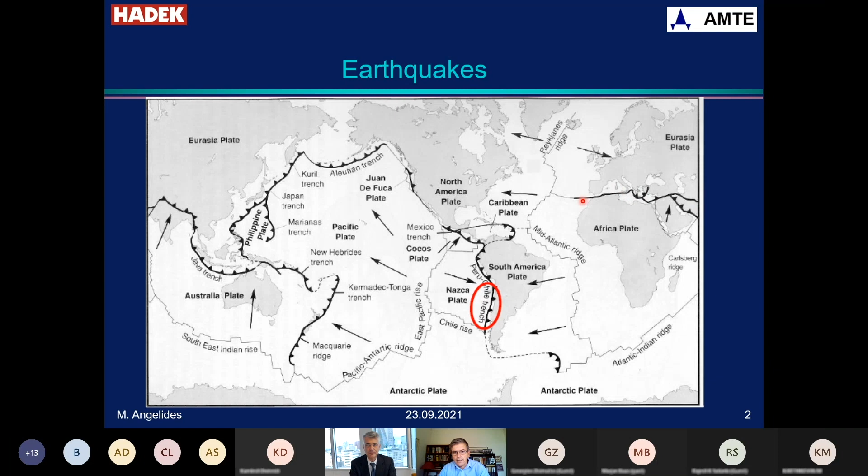This fault line is sometimes called the Ring of Fire. It's the west coast of the Americas, from Alaska down through Japan, Philippines, Indonesia, and through New Zealand. There's another large fault line extending past northern India, the Himalayas, and on the other side Iran, a bit of Syria, Turkey, Greece, southern Italy, and then North Africa—Morocco, Algeria, these places.

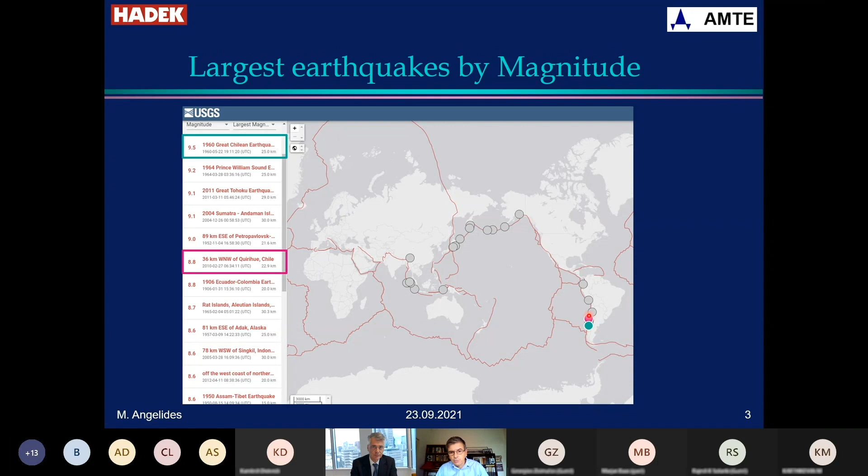This is a graphic representation of the world's largest earthquakes ever recorded, shown as circles. The largest one, this bluish circle, was in Chile in 1960, 9.5 Richter magnitude. The purple circle is the one we'll be talking about—the sixth largest ever recorded, also in Chile.

The mechanism of earthquake generation in this particular case, where the Nazca plate is pushing the South American plate, is by subduction. The plate goes under the South American plate and generates an earthquake when it snaps.

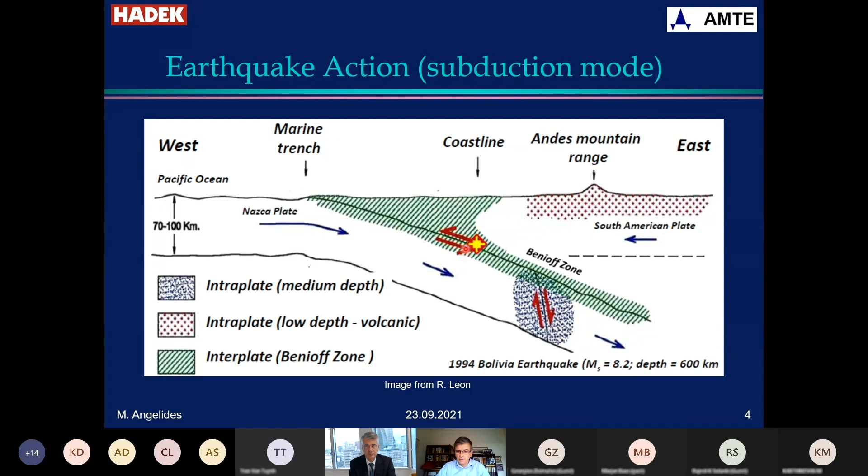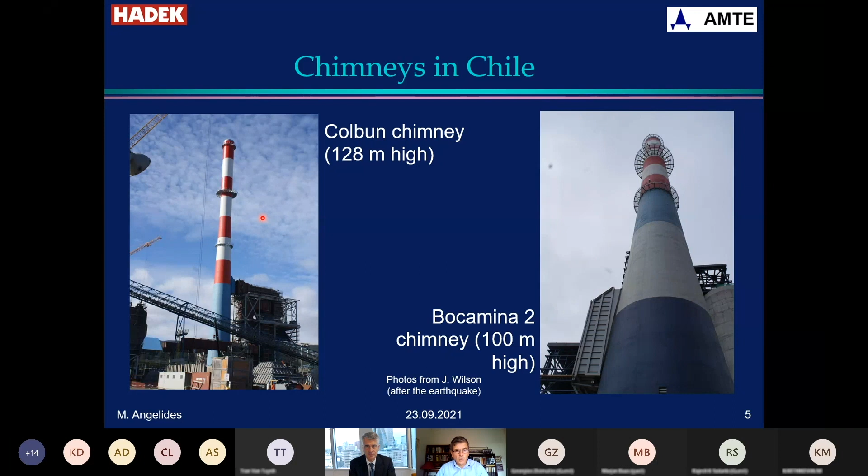The chimneys we're talking about are two chimneys—128 meters high on the left and 100 meters on the right—at the Bocamina 2 power plant on the right, and at the Colbún power plant on the left. These photos were taken after the earthquake, by the way.

This is a schematic section through the height of the two chimneys. Again, these are new chimney design chimneys. Therefore there is no liner—in other words, the liner, in the form of Pennguard blocks, is glued to the inside of the concrete windshield.

In these plants, the owner was Colbún for the Colbún plant and Endesa for the Bocamina plant. For both plants the EPC contractor was Maire Engineering. The chimney constructor was Karrena—today part of the Dominion Group. The chimney designer for both chimneys was AMTE. The chimney type, of course, was the new chimney design.

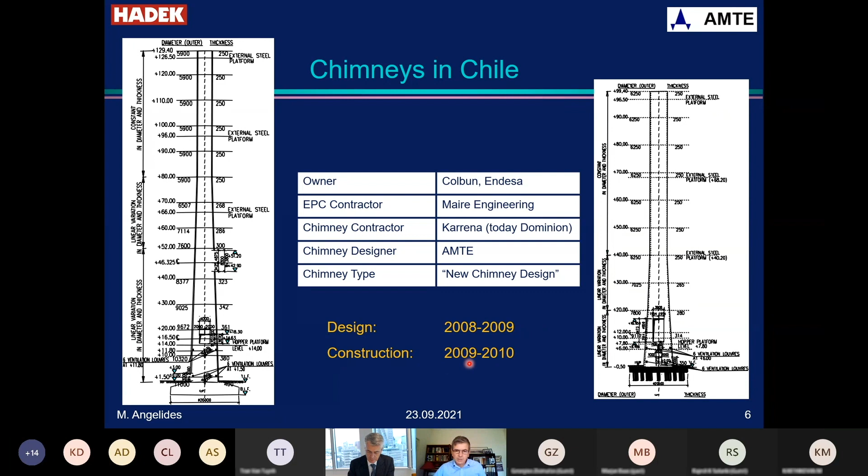The design took place in the period 2008-2009, and construction shortly afterwards, 2009 to 2010. The applicable design codes were the codes in effect in Chile at the time, which includes two earthquake codes. Interestingly, Chile has two earthquake codes—one for general buildings and one for industrial structures.

This is remarkable because industrial structures indeed have different requirements and different responses than usual buildings. The American Code for concrete chimneys was also applicable, as well as the American Concrete Code, and all the other American codes like the Loading Code and so on.

Additionally, the projects had specific, more stringent seismic design criteria set by the consultant of the owner, Professor Ernesto Cruz, and of course the soil report.

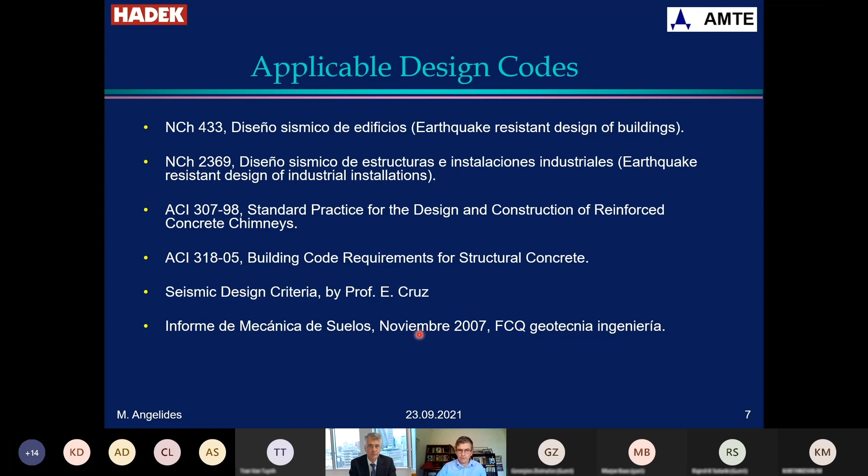Since there are several gentlemen from India, in this graph of the design response spectra I have introduced the Indian response spectra for the three highest zones—5, 4, and 3. In dashed line are the design spectra for the two projects we're discussing, Colbún in blue and Bocamina in purple. You can see the requirements of this project were similar, more or less, to what one would expect between Zone 5 and Zone 4 of the Indian Code.

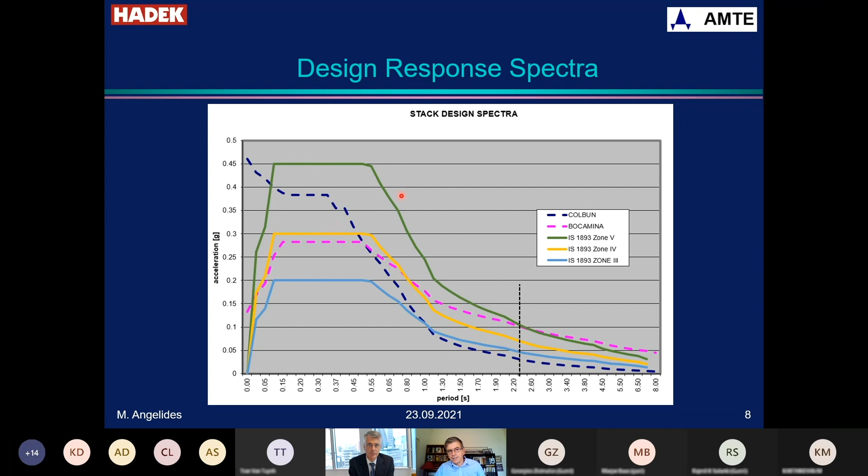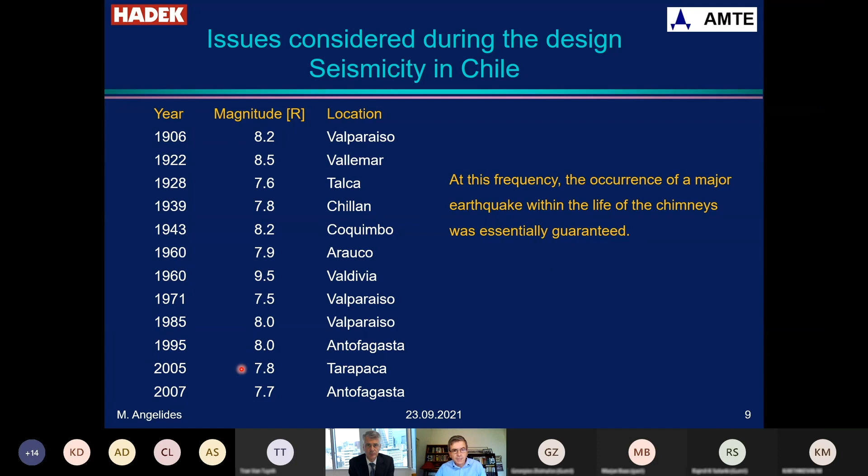With this history, you were assured to get a big one. Of course, we didn't know it would happen a few months after construction.

Looking at failures of concrete chimneys, there aren't that many reported. The most famous one is probably the failure of the Tupras refinery chimney in Turkey following the Kocaeli 1999 earthquake. It was a 115-meter high chimney, and it failed due to a failure of the opening region.

Thermal cracking is usually what is associated with failure in chimneys. This is an example here of typical thermal cracking and inadequate horizontal reinforcement.

There is, of course, a case where a chimney collapsed in India in 2009 during construction, during slip forming, at 240 meters out of what I believe was 270. This was probably apparently attributed to concrete strength issues during slip forming.

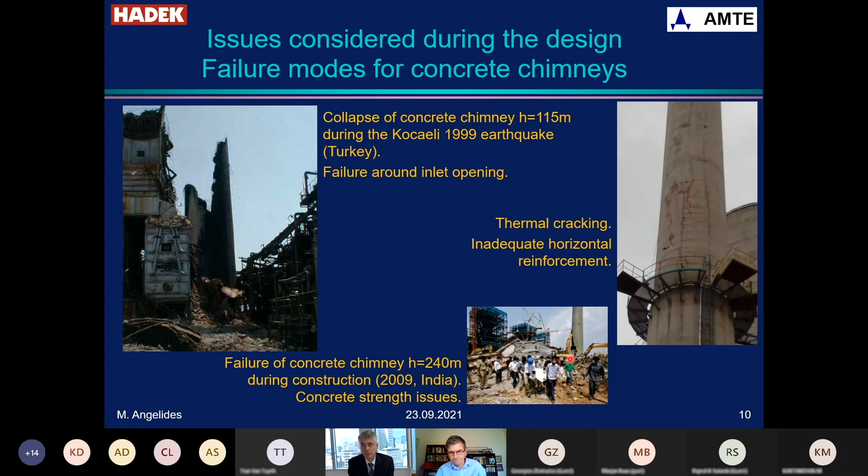So the general methodology followed for the seismic design was as follows. Chimneys were designed on the basis of forces determined from a response spectrum analysis using the design spectra of the project. Because of the seismic environment, the chimneys were detailed for ductile behavior, and we used the CICIND code recommendations for that, which involve limitation of the horizontal bar spacing, increased lap splices for the vertical bars, and limits set for the reinforcement ratio with respect to the axial forces, vertical reinforcement ratio.

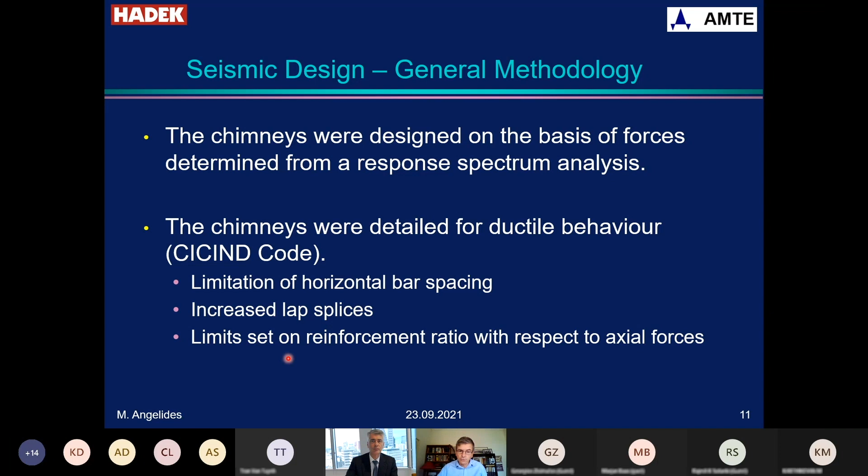Now, going to more specific issues, we used reduced behavior factors at critical locations to ensure satisfactory post-earthquake response, which means resistance to aftershocks. The American Chimney Code at the time, and so did also the design specifications, project specifications, specified a behavior factor R1 equals 3.

This was not a good choice, but it was common at the time. We used in this project 1.5. And this is the value that now the current American code has changed into.

The chimney, being a cantilever structure, does not have any reliable mechanism for developing plastic hinges without essentially collapsing. That's why one has to be very careful about the assumptions one makes about structural damage and without failure, without collapse.

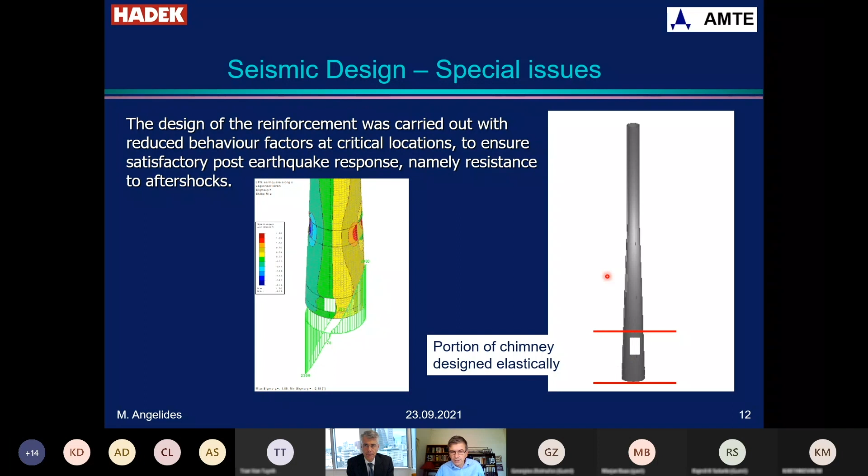Additionally to this reduced factor, the bottom part of the chimney was designed elastically, because there's also another opening, a large door opening, not shown here. So we decided that we needed to design that elastically to protect the chimney.

Another special issue is in chimneys that are tapered. If you remember Professor Gleick's lecture two weeks ago, he mentioned that up to a certain height, new chimney design, chimneys may be cylindrical. In our case, we deviated from that because we have a much higher requirement from the earthquake than usually happens with wind. That's why both chimneys are tapering up to a certain height, approximately up to mid-height.

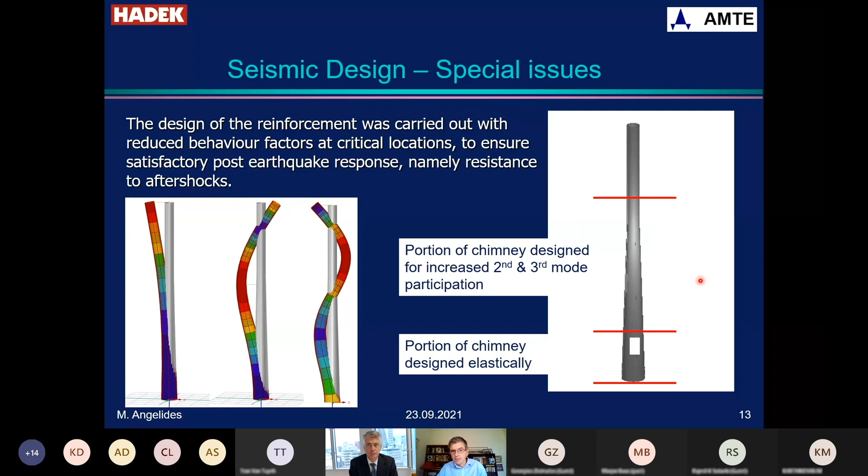Tapering chimneys have particularities where the second and third mode become more important in vibration than usually happens for cylindrical chimneys. Therefore, we assumed an increased participation of the second and third mode. For example, in a cylindrical chimney, you would expect 60 to 70% participation of the first mode, while in a tapering chimney, this changes drastically. Similarly, second and third mode participation are increased in the tapering chimney.

This is important because it gives us significant moments at these locations. And of course, since the behavior of a chimney in an earthquake is not idealized, it's not a sum of modes, but it's a forced vibration, these increased moments could manifest anywhere along that height.

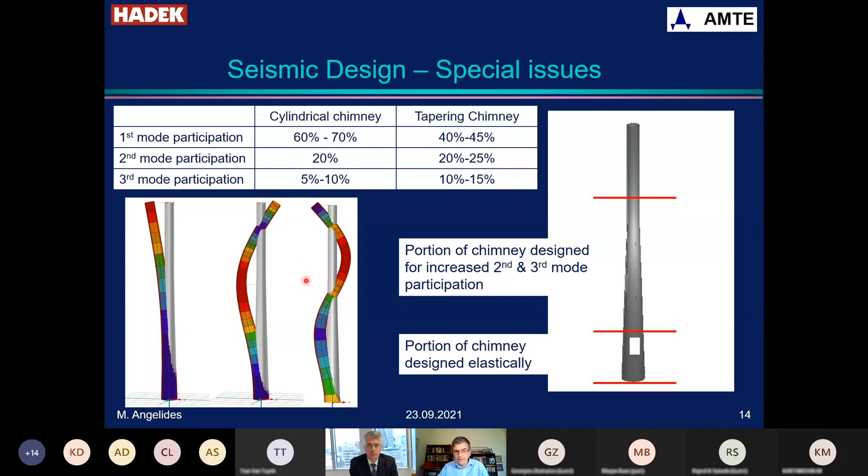We used two sets of models for the design. We usually do that in important projects. One is the design set, and the other is the verification set, to make sure that we control the results entirely. Each one consists of a beam element model without the foundation and of a finite element model detailed with all openings and foundation.

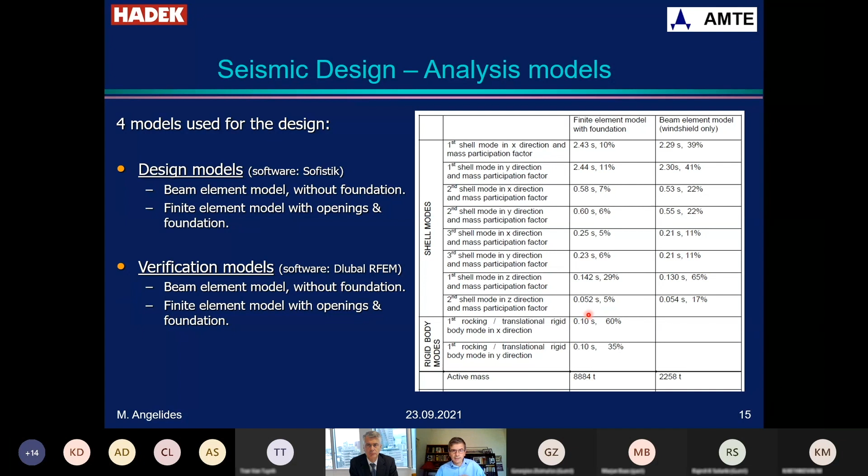You can see here the comparison of results in terms of vibration characteristics with different models. This is the finite element model, and you see, for example, here on the second mode, the high stressing of the region of the opening.

The chimneys, I forgot to mention, have two inlet openings. One is here and one is there. This is already highly stressed on the second mode. And on the third mode, you see here also a rocking mode of the foundation.

In the Colbún foundation was a flat slab, and the Bocamina foundation was on piles. So this image is for the Colbún chimney.

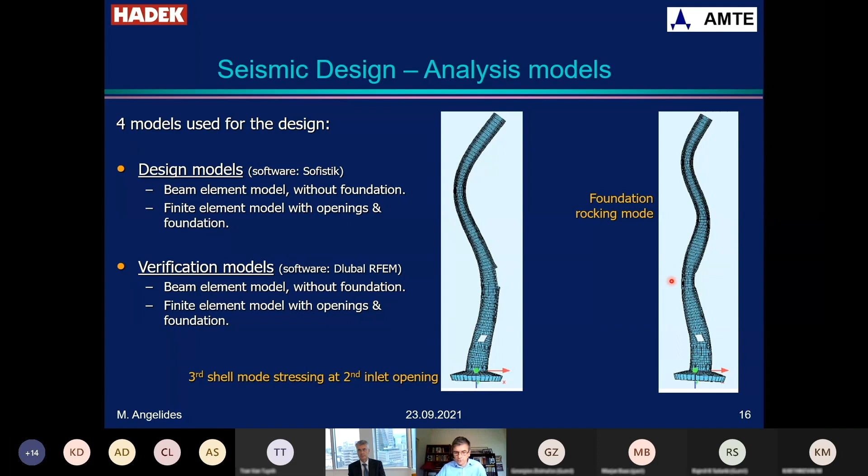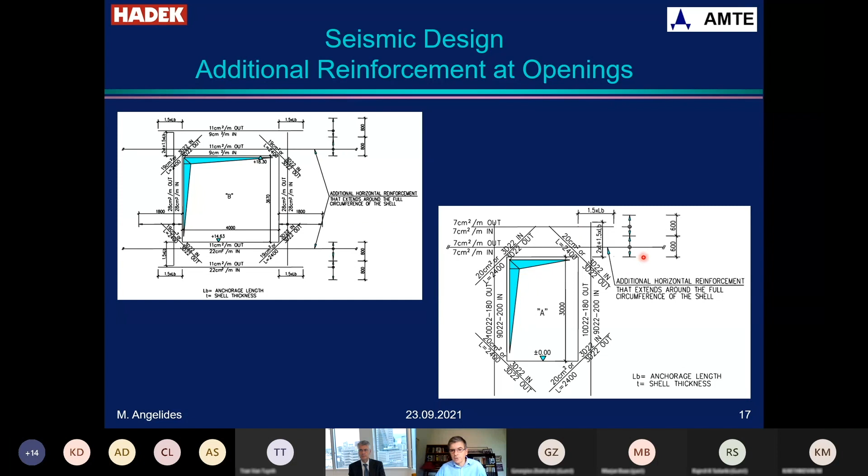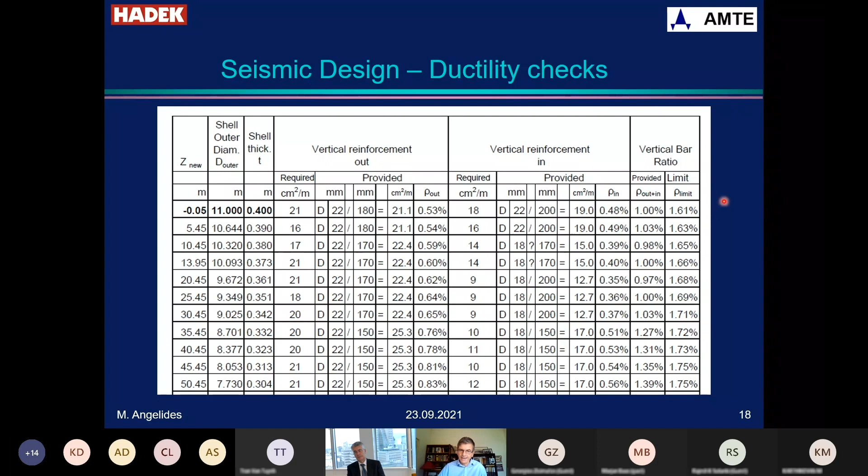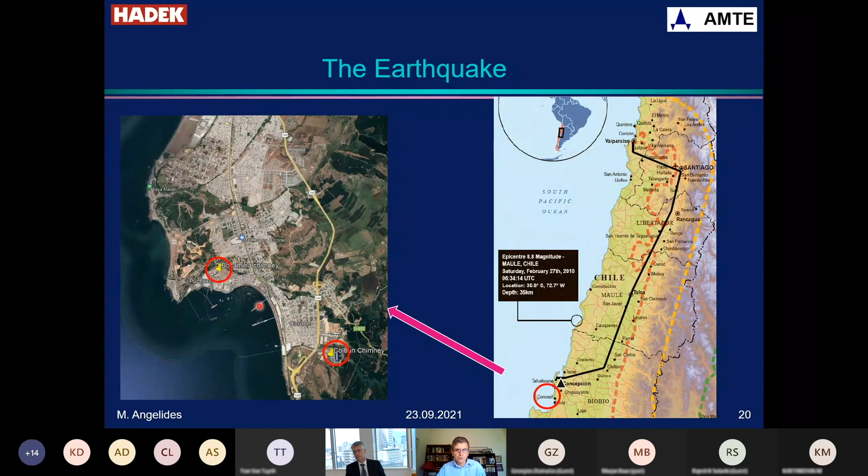You can see here on this map better. This is the epicenter here, this is the southern part of Chile, this is part of this map. In the town of Coronel, from Google Earth, this is where the two chimneys were located: the Colbún plant and the Bocamina plant. These pictures are after the earthquake from the city of Concepcion, which is this city here.

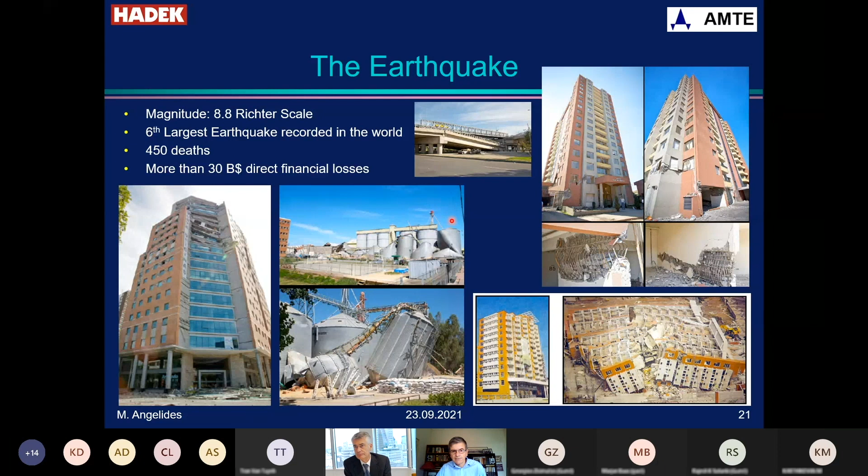And you see here some examples of this damage. You see a failed multi-story building here, the floors have collapsed, a different one over here, and here this is a before and after photograph, an apartment building that completely collapsed. You see failures at the shear walls at the base of this apartment building, a bridge that lost its support, and extensive damage to industrial facilities where we have heavy loads such as these silos which toppled and buckled.

Of course, because it's large in magnitude, it's also large in duration. A lot of energy in a long period of time. So structures that don't have reserves cannot make it.

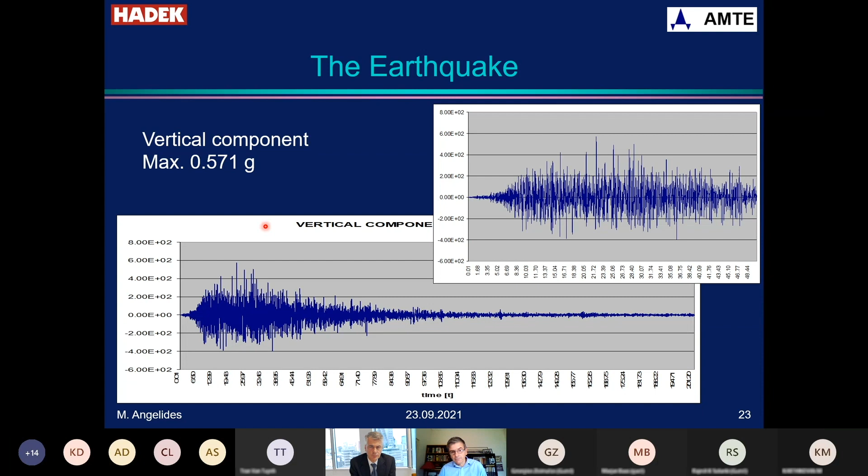Very importantly, because this was an epicentral earthquake, you also had a significant vertical component, 0.57 vertical component. This is very important because usually codes do not prescribe simultaneous combination of vertical and horizontal components for earthquake. In this case, this creates a problem because you realize that the vertical earthquake stresses the vertical bars and therefore reduces their capacity in bending.

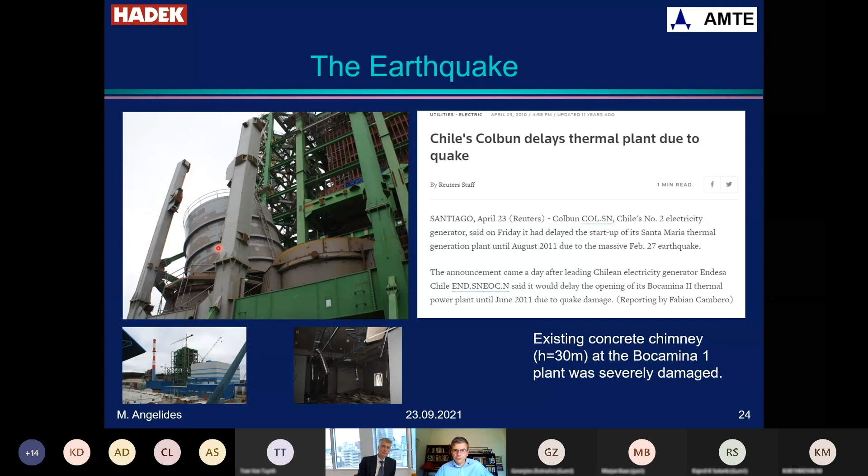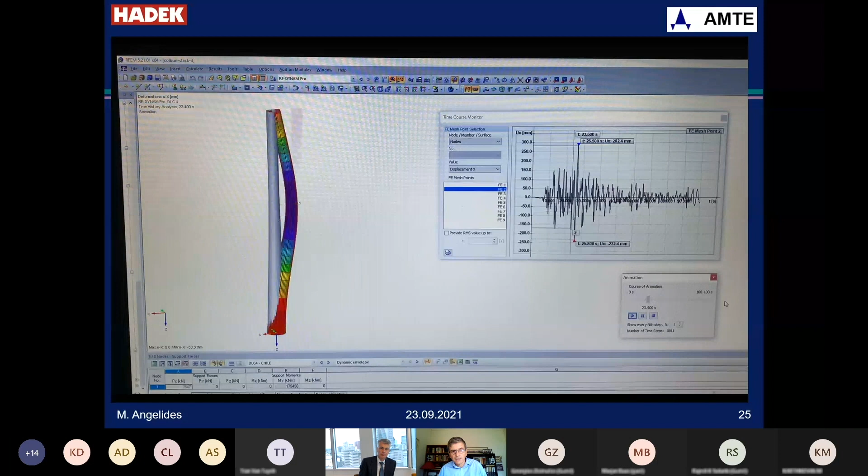Now this is the response of the chimney to the accelerogram. This is a time history of the displacement of the chimney following the accelerogram. You will see to the right, as we go up and down the history, the behavior of the chimney, and you can notice the combination of the vibration modes: the first being the simple cantilever, the second, the third, sometimes the fourth. You see that the combinations change, and that is why you don't really know exactly where that maximum moment would occur when you're designing. But by looking at this, you can tell that you need to take into account all kinds of possibilities.

Now we're at the peak deflection. And then we are now at 30 seconds, and we're still going up to 100 millimeter deflections. Now we have reached 38 seconds, and still the shaking is very significant. This would have been a major earthquake, even this part of the accelerogram, in any other part of the world.

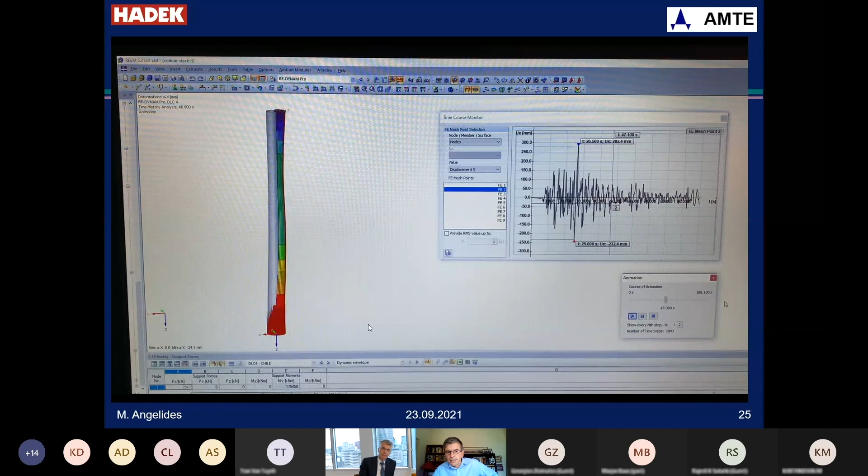And then slowly the chimney dampens out. There is a small increase here of acceleration, but it will dampen out eventually.

After the earthquake, both chimneys were inspected by a team consisting of Professor John Wilson from Swinburne University of Technology in Melbourne and by Mr. Markus Rost from Constructure, whom you had the pleasure of hearing last week.

You see the photograph here of the chimney. Keep in mind that we were a few months after construction of the chimney, so the inlet duct had not yet been put in place. The chimney was completed, concrete and Pennguard blocks, as you see here, was finished, but only the guide vanes were in place.

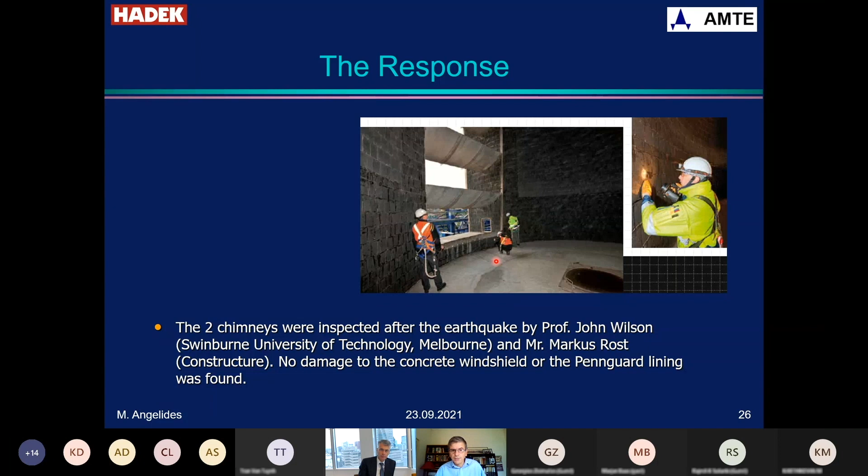The inspection yielded that there was no damage in either the concrete or the lining, that is the Pennguard blocks. Now let's look at the response.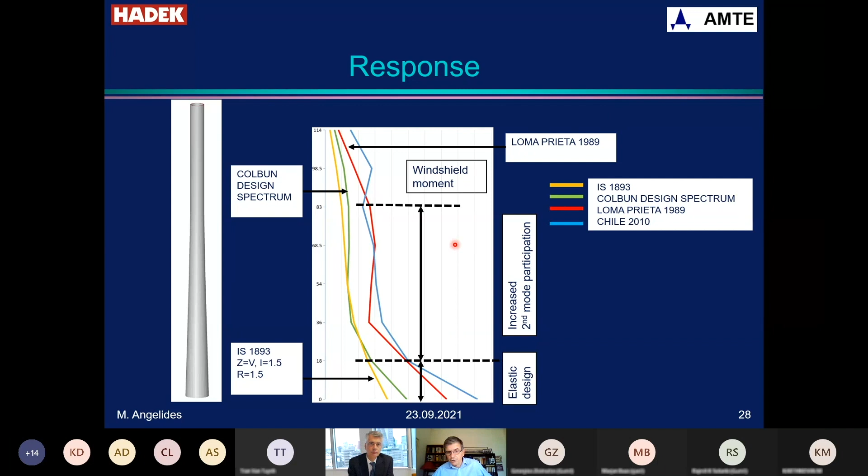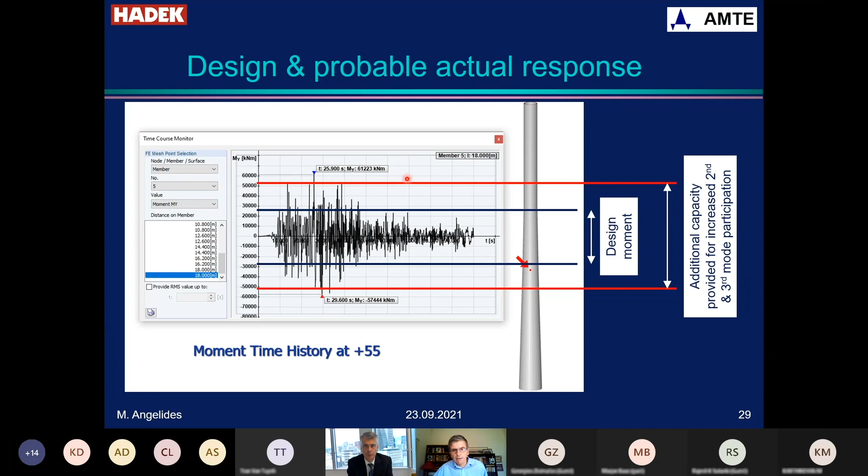This is an example of a time history of a moment, looking at mid-height chimney about here. This is the bending moment along the time of the earthquake. The dark lines are the design requirement, the design moment. The red lines are the capacity given through the provision for increased second and third mode participation. There were only a few peaks which are covered essentially by the safety factors above this line. So basically this allowed us to have a chimney withstand this earthquake without damage.

Now, what would happen had it not been a new chimney design? New chimney design is on the left, and a traditional chimney is shown on the right. By traditional, I mean not brick liner, because that would have been prohibitive in a high seismic environment. It is a steel liner with Pennguard inside. I kept that solution so that the Pennguard cost would be the same in both cases.

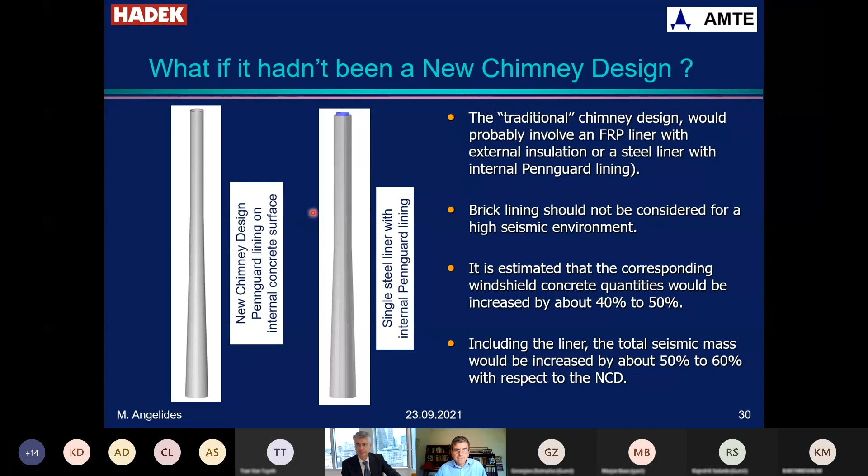We have a much larger concrete structure, obviously, in order to be able to include the lining. This is an approximate estimate that the seismic mass of this chimney is about 50 to 60% larger than this one. Let's see the response now.

This is an interesting fact because usually in the new chimney design, we have a foundation that looks proportionally larger compared to the very slender windshield, but in fact it is not if you compare them in actual quantities. In the seismic case, you have a foundation of the regular chimney that is a lot larger, it doesn't just look larger, it is a lot larger because it needs to prevent overturning. The additional weight of the structure is not enough to provide the resistance to overturning. That's why the foundation is also a higher cost, larger in diameter and in thickness.

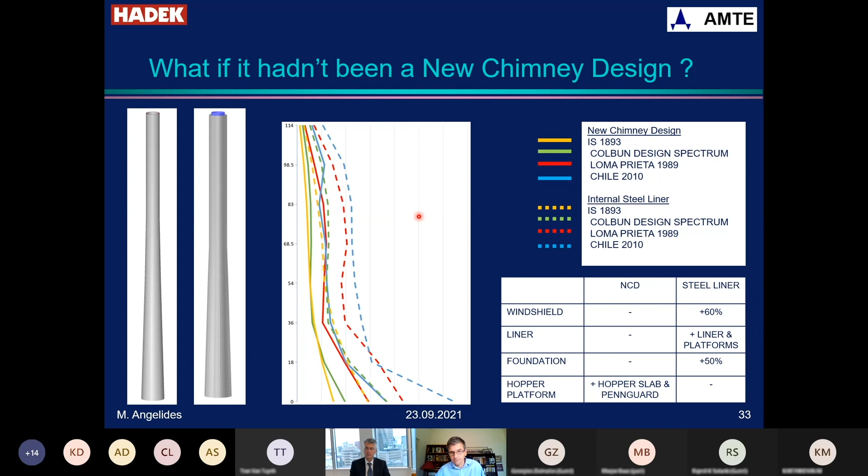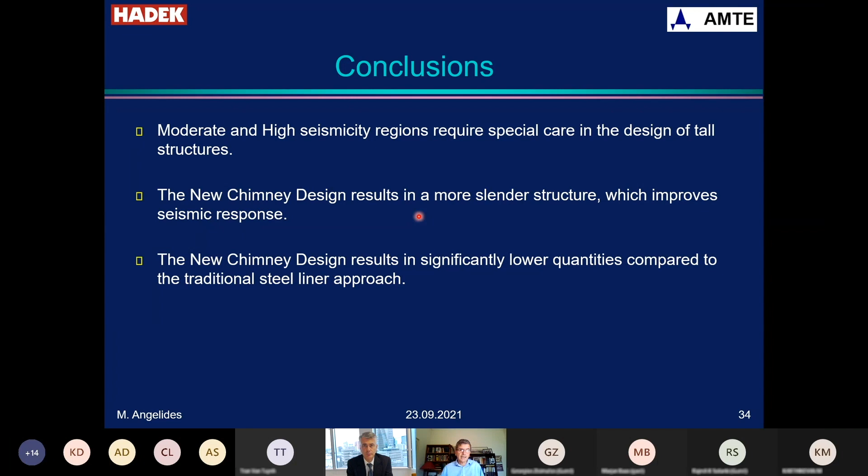So in concluding, the obvious conclusion is that in significant seismicity regions, special care is required for the design of tall structures, not just chimneys. The new chimney design results in a much more slender structure, which improves the seismic response. It's very similar to what you see in trees: a very stiff tree in a windstorm will topple, while a flexible tree will be able to take the wind. The new chimney design results in significantly lower quantities compared to the traditional steel liner approach. Again, brick liners should not be used in a seismic environment.